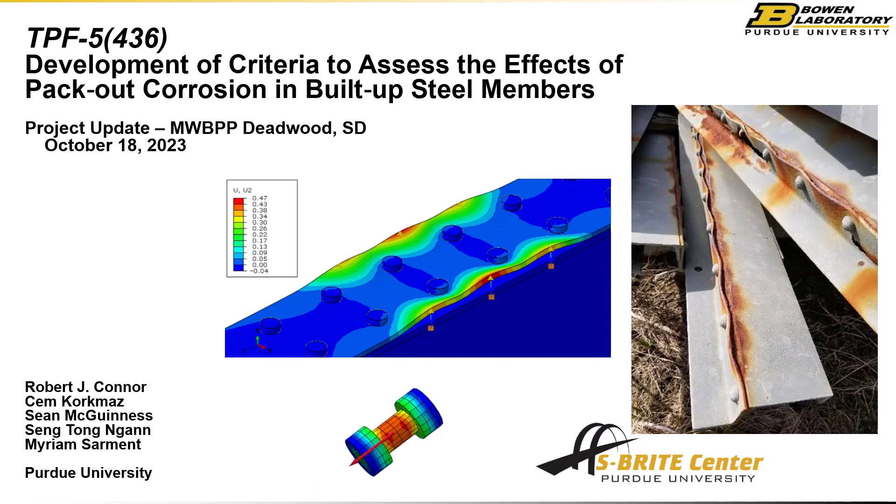So the project has some pretty basic objectives focused on pack-out, right? Is it an issue, right? But one of the things we like to do at Purdue, and I think we've been good at, is turning the research into practice, whether it's AASHTO specs, AISC specs, ACI, whatever it's going to be, so that then there's some implementation associated with it.

So that's really the goal, right, is if there's a way to codify, to give owners a way to evaluate the effects of pack-out, and then also on the need for repairs. In other words, it looks bad, but do I really need to do anything, right? Do I need to strengthen the member? And hopefully, if we have some time left at the end, to kind of give guidance on maybe some best practices, and then, of course, have examples, right? So if you had this, here's what you do.

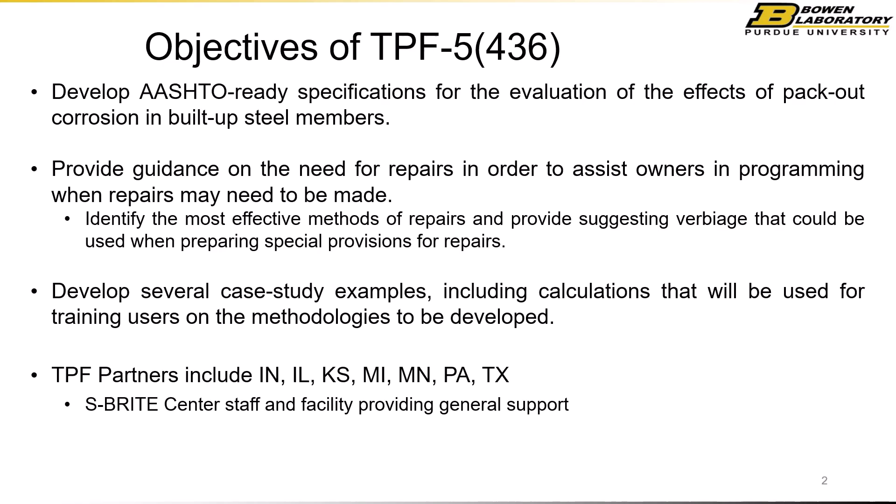And I definitely want to acknowledge our partner states. The study is still active. If anybody thought this was interesting and wanted to continue to support the project, that would be great, because this is what we call in the research industry a COVID project. This is one that started right at the beginning of COVID, and we kept graduate students funded and things like that. Financially, a lot of universities dealt with significant burdens because of COVID, just trying to keep people employed like everybody did, but it hit the research group pretty hard.

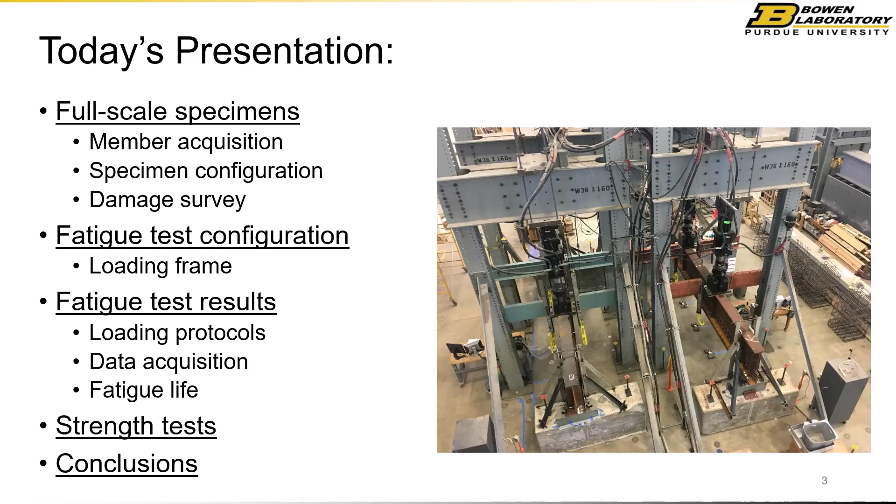So I'm going to focus on the testing that we've done, how we came up with some of the members, some fatigue testing - that'll be the real focus - and some strength tests, and then just kind of give you a little teaser on some of the compression member work that we've been doing, and then some conclusions.

Now, one of the things that's critical when you go into tension, right, if you're looking at fatigue or fracture - fracture meaning kind of strength - all those little nicks and gouges from corrosion and all that have to be in the member. I can't simulate that. We want to have the real damage. So that means we need real members with real corrosion.

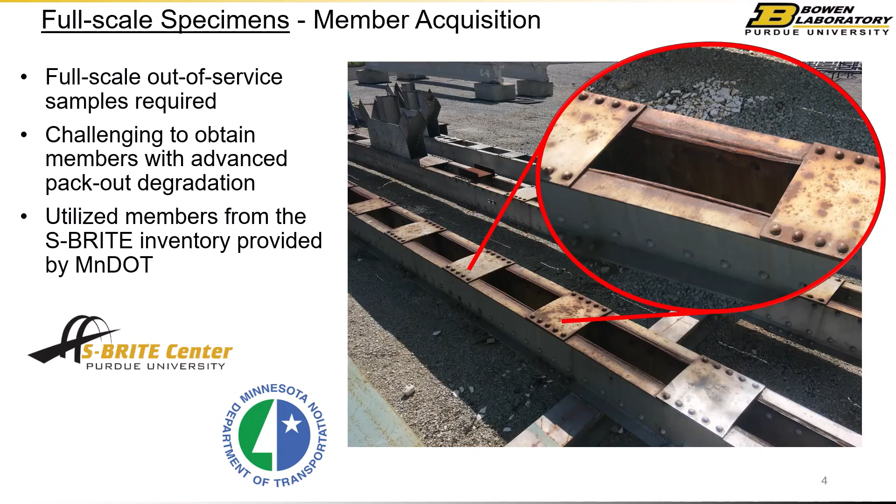Well, when we were doing our internal redundancy work, we obtained some members from Minnesota DOT from a bridge called the Winona Bridge. It's been a challenge to obtain members with corrosion coming out of service that then get programmed properly to be able to be used. But we were able to use some members from the Winona Bridge, I'll show you, and then some members we had at our bridge center at the S-BRITE Center.

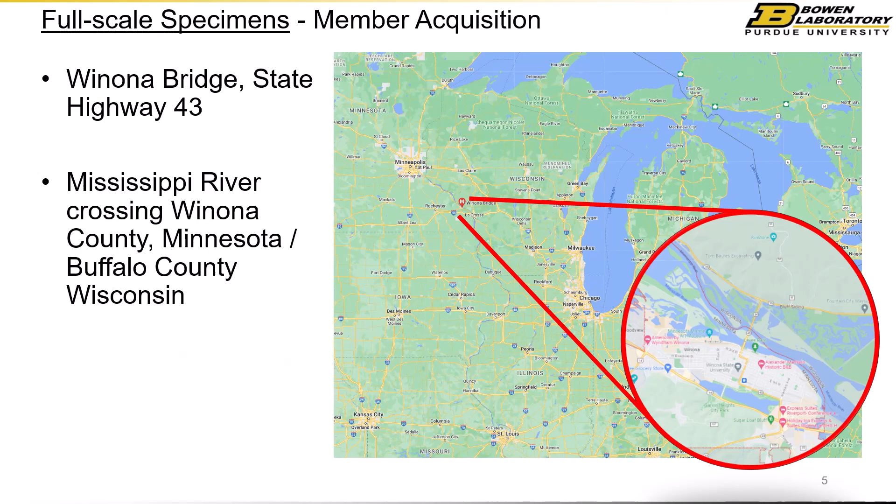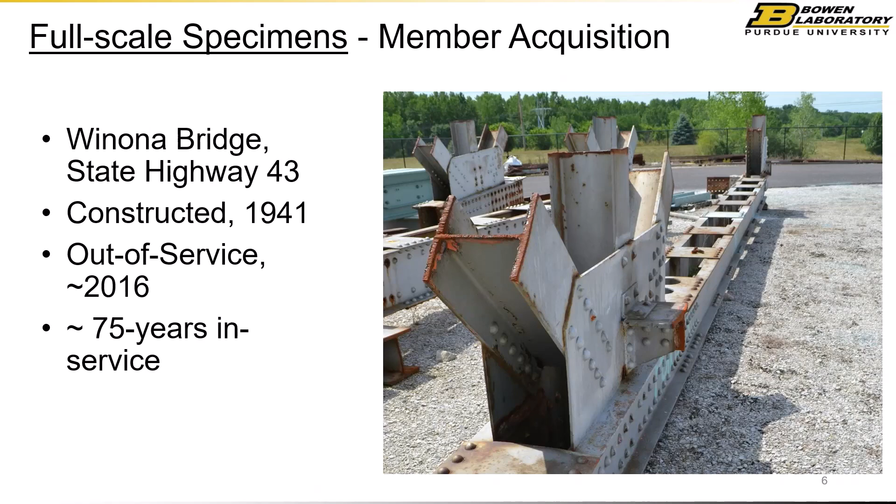So again, the members came from Winona. It was in service for 60 plus years, maybe 70 years, and it was a big river crossing up there in Minnesota. Here's some photos of the members, and we've gotten a lot of mileage out of these. We did internal redundancy tests from previous work, and then the ones that were more damaged were very useful for this project, right? So again, about 75 years of service or so when the bridge came out of service. These were tension lower chords, so they've already seen fatigue cycles, probably low stress range, right, because in service we see low stresses.

Now the challenge with these is, although they're great and they have pack out, they're truss members. In fatigue or in strength, it's difficult to test things in pure axial tension. The loads go huge very quickly.

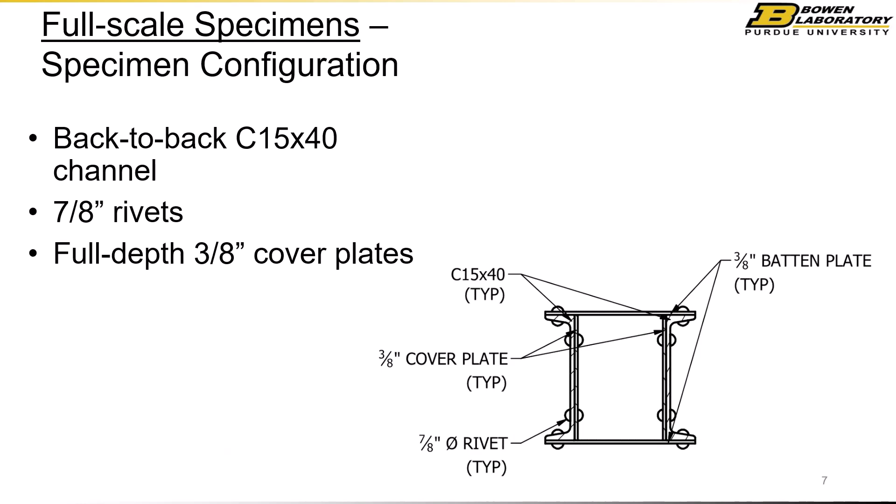Flexure is a much more attractive way to do fatigue testing or strength tests. But they're the typical built-up member you would see. These were rolled channels with cover plates, and that's where our pack-out corrosion ended up happening, where we had the cover plates.

So we converted these then to flexural members. We take the truss chord and separate it into two halves, then we treat those halves as flanges with a constant moment region, so the flange is effectively in uniform tension over a given length.

So we split the chord, cut the batten material out of it, and now we have these members. You'll notice they're cleaned up, and that had to do with the lead paint. The fabricators couldn't work with the lead paint, but we told them to take care not to remove the pack out.

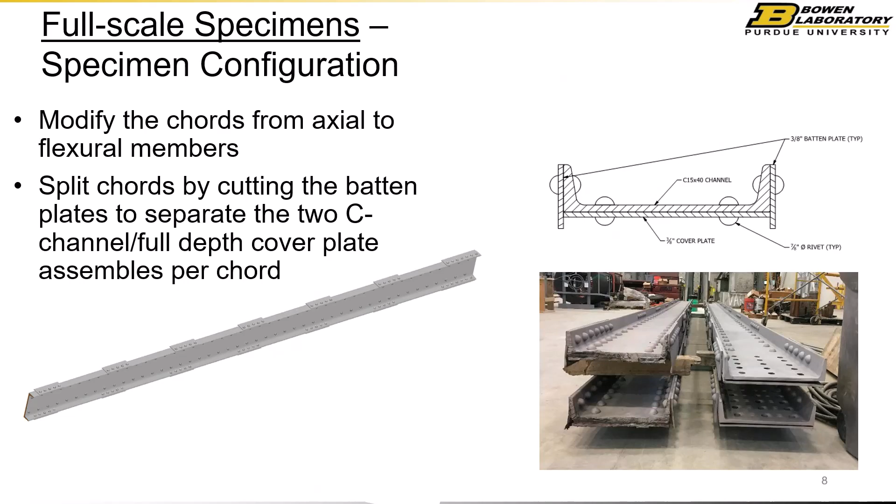If you've ever tried to remove pack out, it's hard to do. Blasting through a wheel abrader doesn't really take it out. It's like rock - it doesn't come out too easy. So we split the members, and we end up having four separate components.

We then added on a flange, our new flange, added on a web that is then bolted on and allows us to reuse the upper portion of a plate girder. So basically we took these, split them, and built plate girders.

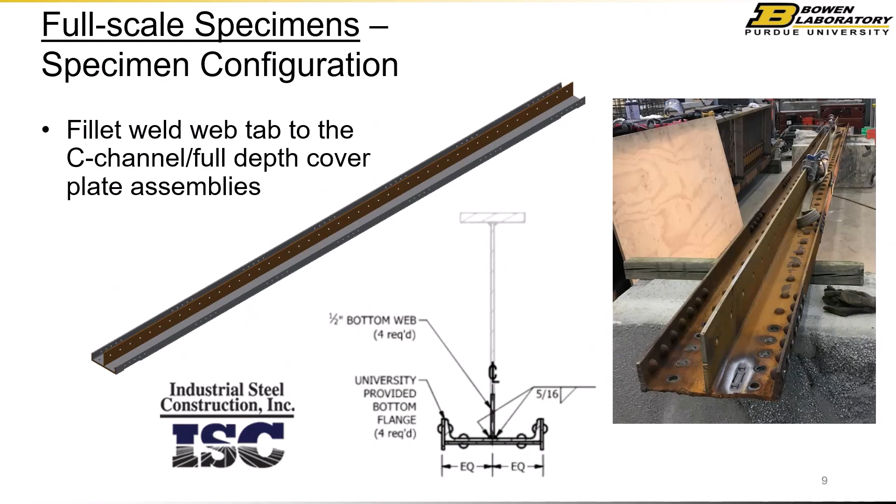Then we can load them in flexure, which is much easier to do to get stress ranges we want at more modest loads using servo-controlled equipment. Then we bolt that all up, and this top piece we can reuse, and then the bottom piece we just change it out. So we create this nice I-shaped member.

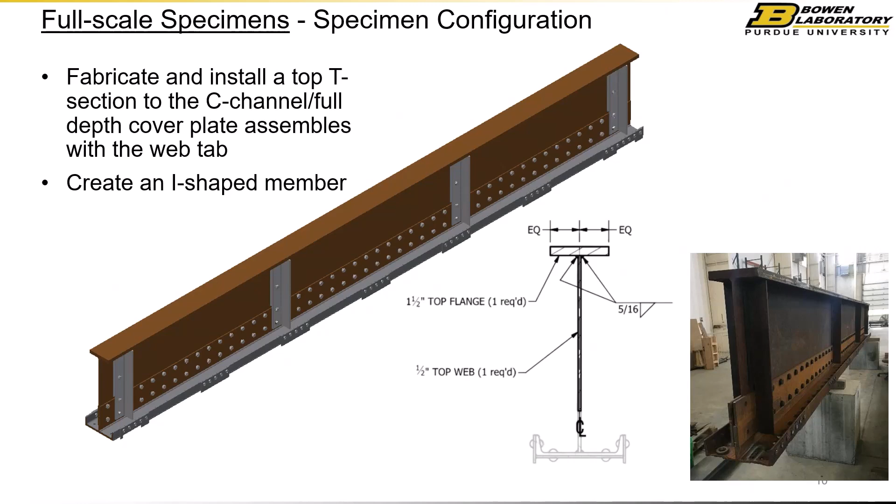So these were pretty good size - decent flexural members. They're big and difficult to handle - you're not going to pick it up by hand or anything like that. Then we take that member and we document the damage a lot.

We did this by hand. We tried to do some of the photogrammetry, and it worked okay, but it just wasn't working out as good as we would have liked. So we took the time to go and lay out grids and measure all that damage.

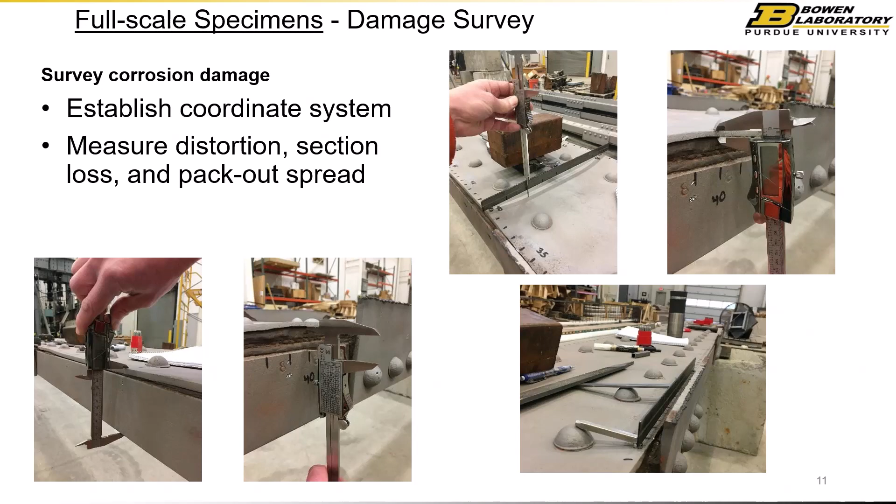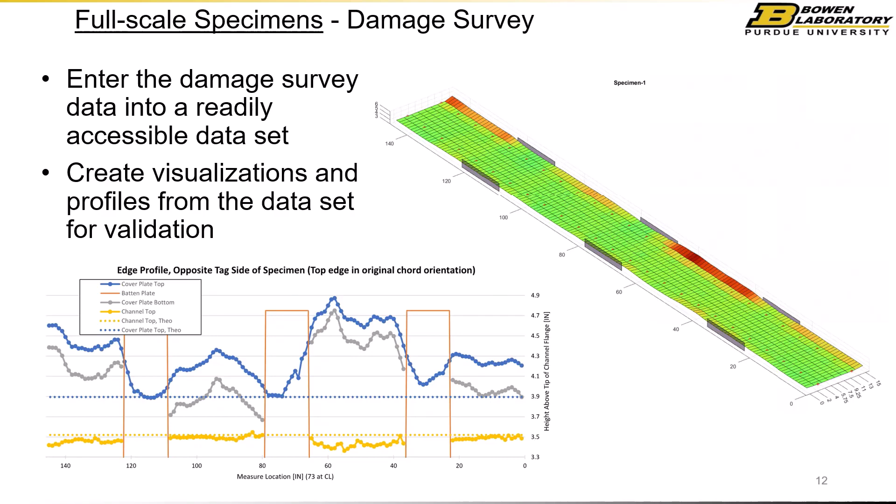You take all that information and map it out, and get a feel for where most of your damage is. That becomes useful to put into finite element analysis - you can map all those surfaces in there. But the point is, there was a lot of damage and a lot of section loss. So these are severely damaged components.

In terms of loading for fatigue, we have a couple of large setups at the lab at Bowen Laboratory to allow us to run multiple fatigue tests at a time. We are running twin fatigue tests side by side to try to go as fast as we could to collect the data. Some tests were done in strength for compression members, but for fatigue, these setups work out really nice.

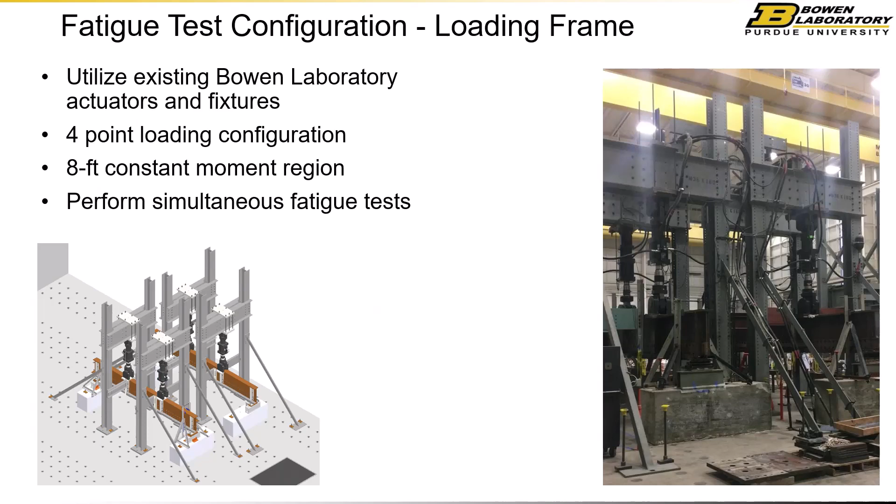So we have an 8-foot constant moment region, or zero shear, and that gives us a nice uniform stress range over a significant length of rivets and where the damage is. And then we have a shear span portion also where we have a fair amount of damage and stress range, but also a good amount of shear.

So here's the 30,000 foot results - I'm not going to get into the details and show you each specimen. Now, bridges operate at low stresses. In reality, we talk about the categories - fatigue categories - but our goal was not to define a fatigue category.

We're not running at 20 KSI and these high stress ranges that we typically do, because in real bridges, when you instrument them, you operate around 3, maybe you'll get a 5 KSI once in a while. Our goal was to try to say, in real operational circumstances, does the pack out hurt you? Because that's what you're dealing with - bridges in real service.

Now, rivets are typically classified for first cracking as Category D, so we ran just over the threshold for Category D. While that's good, it's also painful because you start looking at the cycle counts that you need - they get very high very quickly at low stress ranges when you're running just above threshold.

Now, if you're familiar with the AASHTO fatigue curves, there's also what's called the design curve, the curve when you open up AASHTO you see. That's the lower bound curve, associated with a 97.5% roughly probability of survival. In other words, if I ran a fatigue test to the AASHTO curve, it shouldn't crack.

So I don't want to stop my test there, because there's only a 2.5% chance something should have cracked. We run past that. You can run to the mean or the upper bound. We chose to run to upper bound, meaning there's a 97.5% probability it should have cracked. Now, riveted members usually do better than Category D, but that's where the data fall out.

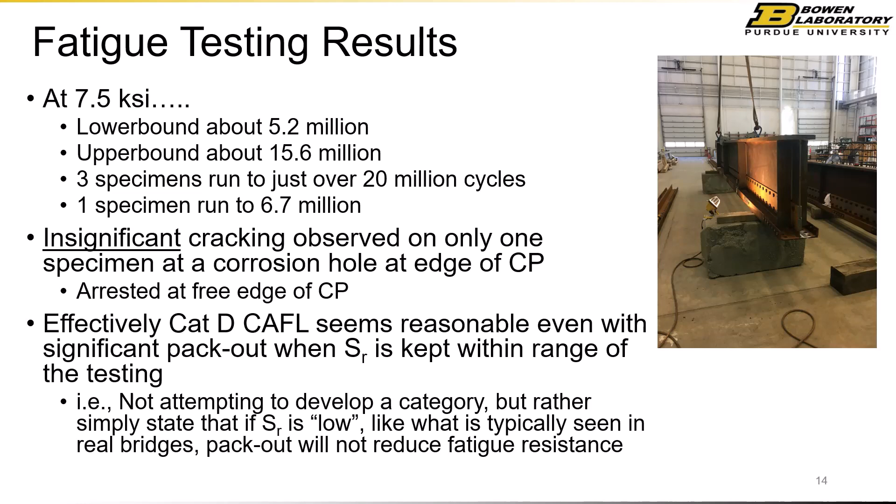So Category D, which you could use for evaluation, still seems reasonable when you have significant pack out. But that wasn't good enough for us. We said, okay, we've done all that, let's jack up the stress range.

So we took specimens and ran it up to 12.5. Why 12.5? Well, category C has a threshold of 10. Riveted members for evaluation in the MBE were allowed to use category C. So we said, let's go above category C and see what happens.

It's hard to dial in perfectly, so the number is 12.5 to 13, lower bound of 2.25 million up to 7 million. We ran these up pretty high in terms of life. We didn't take them all to upper bound because they already had a lot of damage on them.

And nothing happened again. The only cracking we saw was on a side plate. If you remember, they were channels, and there were some rivets for batten plates on the side vertical leg of the channel. A couple of those started to crack. So that was good news.

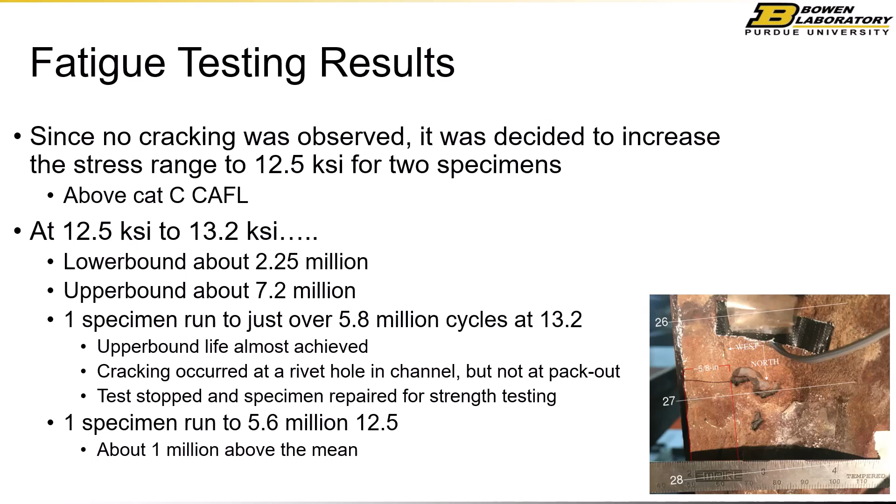Now you can combine all that data into effective stress range calculations, and this is the big takeaway: if you look at the data with your category C or category D dashed line, either it's a run out - nothing happened, to the upper bound lives - or there was a crack, but it had nothing to do with the pack out. It was just a crack at a rivet hole.

So why the good behavior? Well, if you've taken apart pack out - and I'm just talking members with good old pack out, not the stuff where there's holes you can put your hand through the web - when you separate those surfaces, they're actually very smooth. What we think is happening, and we're looking at this analytically, which is hard to do, is that if you don't create damage from the distortion, or crazy pits because the surface is pretty smooth, then it becomes a stress concentration factor that really drives fatigue.

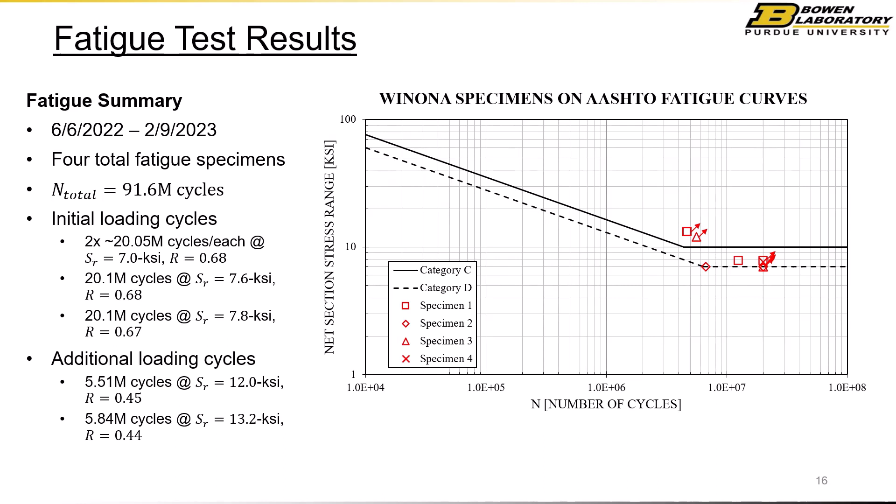If the distortion gives you a stress concentration - if that distortion doesn't exceed the stress concentration associated with a plate with a hole in it, basically a stress concentration of 3, then you're not going to see worse behavior. The distortion amplifies the local stresses, you get bending, you get this stuff going on. But if you don't exceed anything worse than what the hole is, just from the pack out, then it makes sense that you wouldn't see a reduction in fatigue strength.

So how would you implement this? Well, right now, here's what we're thinking: we're not trying to define a category, so we wouldn't tell you it's category C or D. We would use threshold numbers - like, if your stress range in reality is kept below this value, then it's as good as it was before for category D. And in real bridges, you're not operating at 15 KSI or something like that.

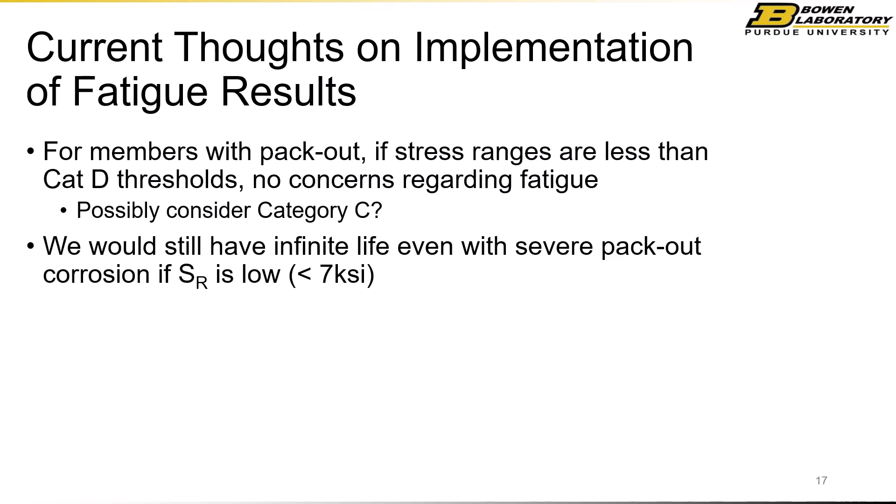So this would be one where, if you were concerned you were running high, you could put a strain gauge on it to show you were actually a lot lower, and maybe we'll consider category C. We would still have infinite life concepts if you have pack out - again, I'm not talking about when something's completely destroyed. So the challenge then is going to be, what is that limit? We had about 1 inch to 1.5 inches of distortion, and you can correlate the amount of distortion or pack out to how much section loss. That's the guidance we're trying to craft now - how do you implement this?

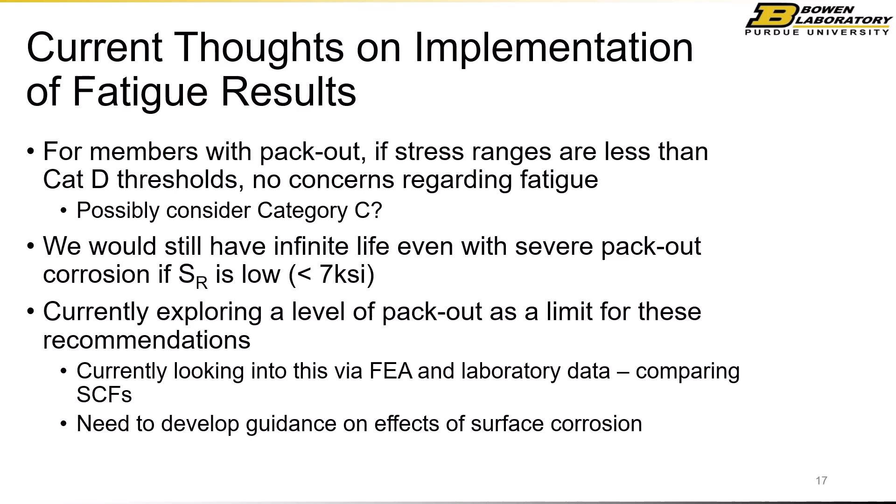If you had a half inch of pack out, does it matter if you have one inch of pack out, and plate size versus rivet spacing? So that's all being done right now. But the good news is, if you had a member with pack out, it doesn't appear that the pack out itself is going to kill you in terms of fatigue or have it look bad. It doesn't seem to be that big of an issue.

Now, that's fatigue. The other side is strength. What does this do to us in terms of strength? We didn't anticipate a big reduction in strength based on the work we did on internal redundancy. That work was when you would fracture a single cover plate, so you have two or three cover plates and you fracture one. What does that do to the strength of the member? In that work where there was no damage, there was really no effect. So the thought was, I wonder if that's still going to work here.

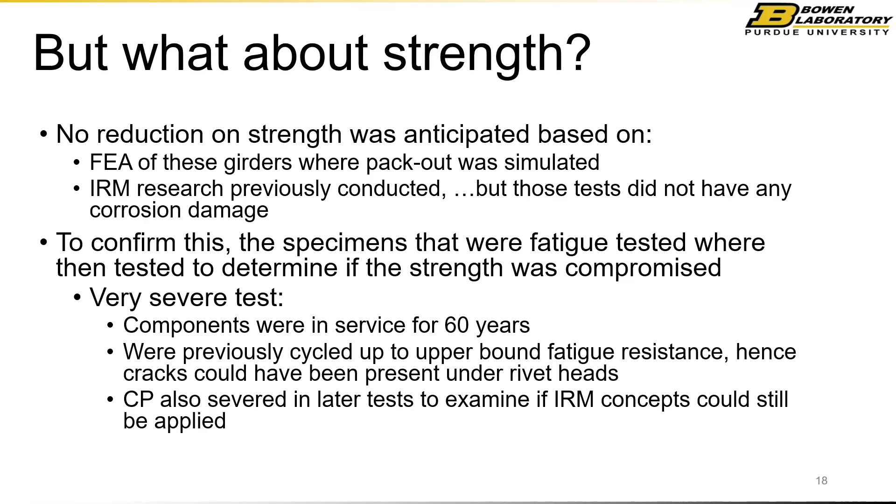Analytically, even with the distortion in the finite element models, it showed there wasn't going to be an effect. Again, the internal redundancy work suggested that as well, but we had to confirm it. So we took the girders that had the equivalent 20 million cycles on them, put them in another fixture, and did strength tests where we would take them up and try to see what the ultimate strength would be. This takes a lot more load, so we had to switch our fixtures.

The numbers I want to call your attention to are in the undamaged condition. If we just said, what was the girder the day it was new, what's its MY, what's its MP? These are the kind of kip loads we'd be looking at, significant loads to get to MY and MP. And again, these already had damage on them.

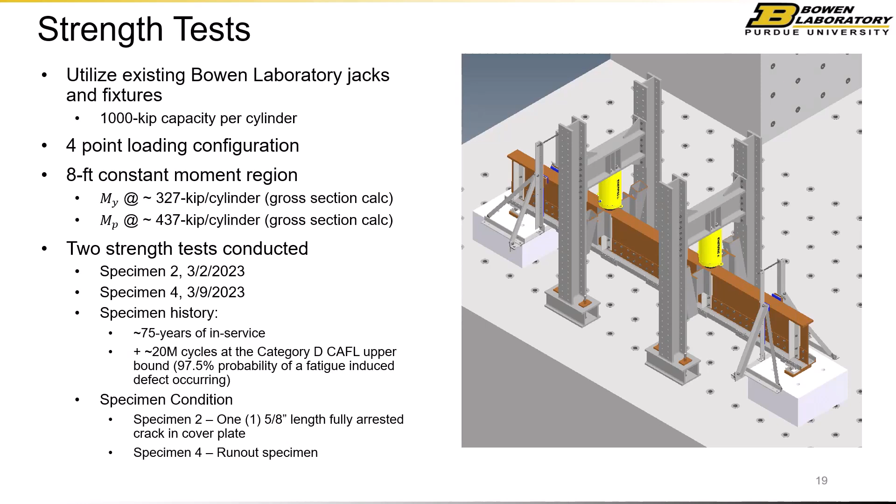So what's the summary of this? We tested these two, and if you look at the kip numbers and where we're yielding, take a look at that red text. With a cut cover plate, we loaded them up and nothing really happened. So we kind of like to say, what's the worst thing that could happen? Well, the cover plate that has the distortion in it fails, somehow it fractures, it corrodes away, whatever. So we cut it. You still get to MY of the undamaged cross-section.

Now you might think, why is that? It's not there. The reason is in built-up members there's a neat behavior. It isn't a single plate, it's not one component, it's a whole bunch of components stitched together. When you sever one component, the load comes out, goes through the fasteners, into the others. The takeaway is you don't get widespread yielding. The yielding stays very focused. And because of that, the material that hasn't yielded around the material that's yielding gives you constraint.

In other words, it gives you a benefit in terms of strength. So the member hardly deflects, the stiffness really isn't any different. You will never perceive deflection if you have a broken component, but you can get to the full strength. And that's also good news. In fact, one of the specimens basically got to MP, except we had some issues with some bracing that started to fail for lateral torsional buckling. So the strength part seems also consistent.

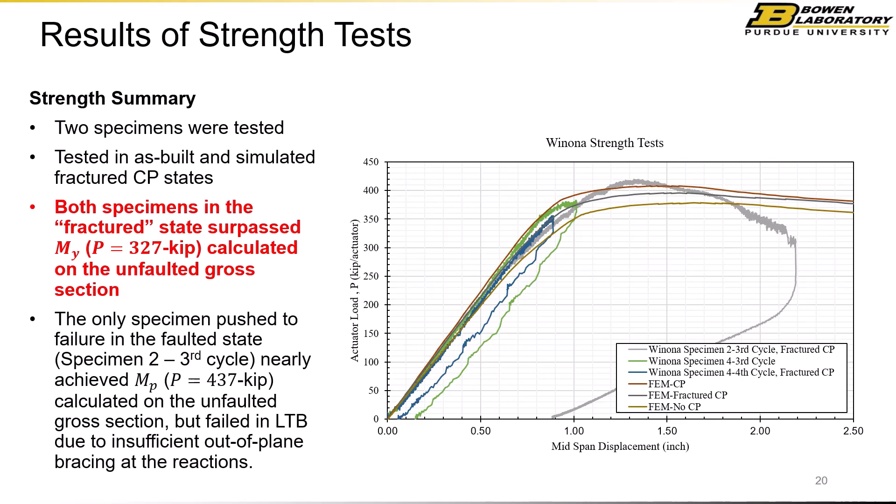So what we think would be the recommendations that are in the internal redundancy specification, we could still utilize those. They look really bad, and it turns out it doesn't seem to be that big of an issue. Now, this is the kind of pack out we're talking about, like where this is one inch to 1.25 inches, so it is significant.

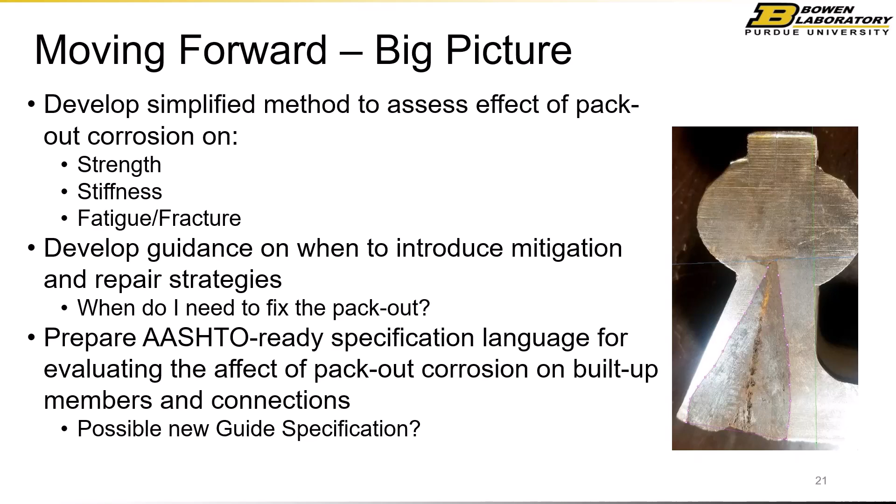So in the big picture, our goal is to put some simplified methods to assess pack out. If there is an impact on strength, maybe we'd have a lower phi factor or something like that just to be conservative. No change in stiffness, so we would give guidance on that, and fatigue as well. And then this idea of mitigation—when should I go in and do something? Now, this data would say it can get pretty bad before you need to do anything, but how much do you want to let it continue? It's still going to continue to corrode. So that's language we're trying to figure out right now, and then turn this into AASHTO specifications.

And then that's all in tension—that's tension flanges. However, for compression, we're also doing work on sub-members, small members that have really bad corrosion and holes in them and things like that. And when it comes to compression, I don't need all the little nicks and gouges—or I shouldn't say nicks and gouges—but the pits from corrosion that could hurt me in fatigue.

In compression, I don't need that. And so we came up with ways to simulate the pack out, where we would distort plates, just tightening bolts together, then putting in mild fasteners.

We machined plates away and then added distortion. That allowed us to dial in different levels of distortion in compression, different levels of section loss. And that's really great for calibrating finite element models.

As it turns out, there's not a big effect, and it's kind of obvious. If you have two cover plates and you lose one, the overall impact of that cover plate on the cross-sectional properties usually is somewhat small.

If only portions of it are damaged, what we're finding is a real easy way to address this is you just say, well, anything outside of the rivet, maybe I don't have that material, I just pretend that material is gone. For tension, that's very reasonable.

For compression, our only concern, and this is what we're looking at, is well, yeah, but this little buckle could want to get bigger, and maybe that gives me some odd behavior. So maybe I have pack out on this side, not on this side. How does that hurt me? So that's what we're looking at right now.

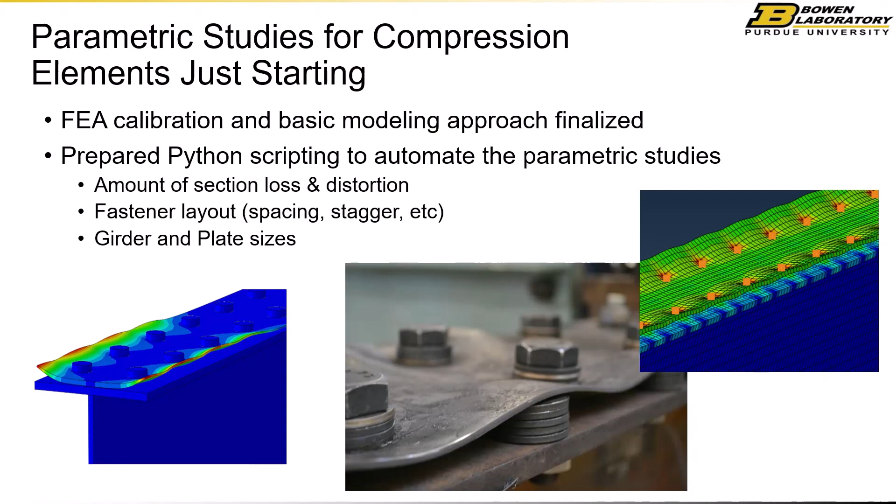It's a real interesting project. I think it's going to have some good impact for our industry. Hopefully the next time I am presenting this somewhere, in the next year we'll have some basic code and commentary we'll be running by AASHTO. So with that, I'm open to try to answer any questions if I have time left.

Just for those of you who, we have a lot of our SBRITE partner states here—if you haven't ever visited, come visit sometime. That's our bridge center where we do a lot of our inspection training and so forth, large-scale specimens for the SBRITE Center. So nice little playground we get to have for our bridge research, inspection, and training.

Thanks, Rob, for the presentation.

Very interesting. So you said that one of the hopeful results is going to be some guidance to the bridge owners on when they should consider doing something, when they see it, when should they think about it? Because I know now people think, oh, we better do something. And what you're saying is maybe not—at least from a strength or fatigue point of view.

And not to be academic, right—I know there's other reasons to fix stuff. Because I might look at it and say, well, I don't think it's going to hurt you, but it's going to continue, right? So our guidance would be more, at this point you better do something because you're going to lose strength soon, or there could be a fatigue effect soon. That would be independent of, well, yeah, but the corrosion is going to take off.

I can say some of the people involved with the project, the states who've done mitigation, kind of feel sometimes they've accelerated the problem by taking out the pack out and basically creating cups for water, because some of the sealants don't work super great.